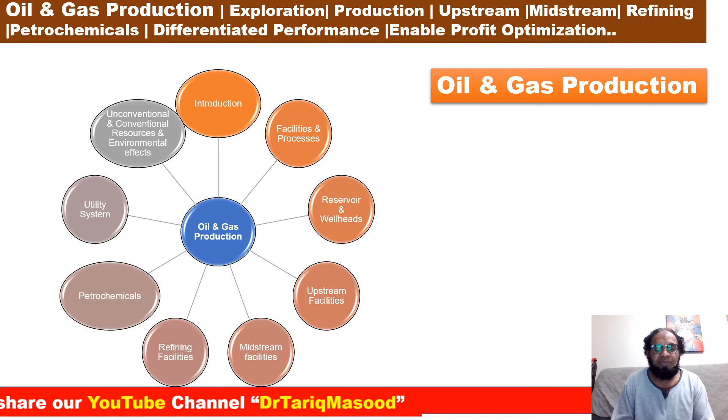Now we have already started discussing this area. We are discussing unconventional, conventional resources and environment effects.

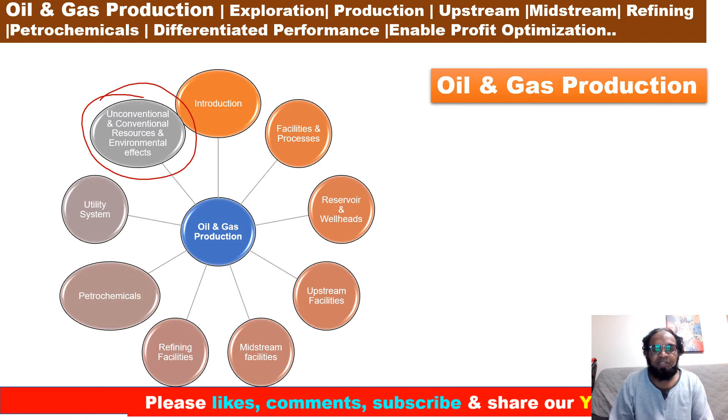Okay, what is the ultimate goal? Shaping the clean and sustainable global energy - this is the first ultimate goal, and we have a plan to deliver more than 300 lectures over the next couple of years.

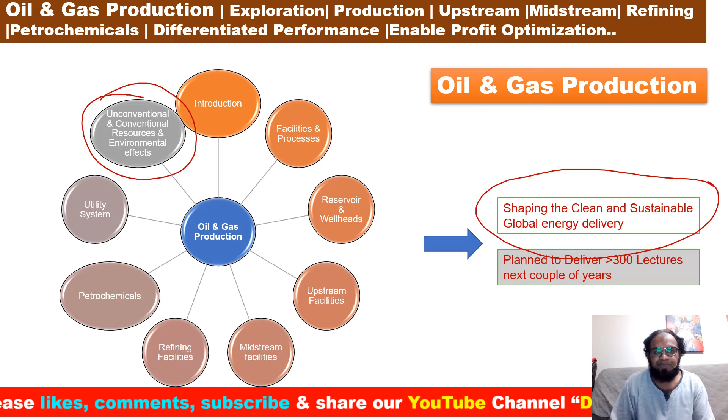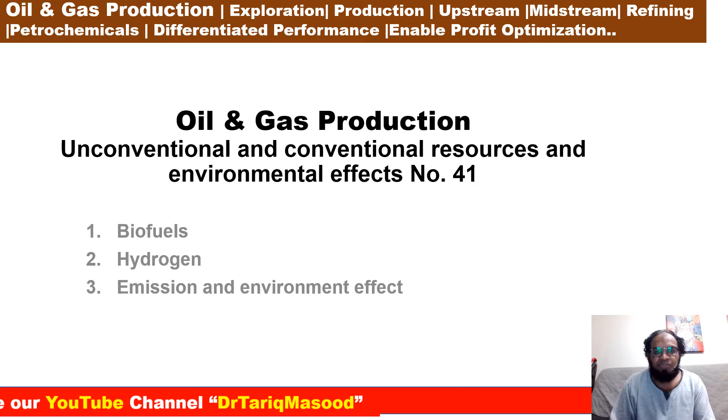Gas production, unconventional and conventional resources and environment effects, lecture number 41. Biofuels, hydrogen, emissions and environment effects. So, key takeaway points from lecture number 41: biofuels, hydrogen, emission and environment effects, we are going to discuss today.

Biofuels are produced from specially grown products such as oilseeds or sugars and organic wastes, for example from the forest industry. These fuels are called carbon neutral because the carbon dioxide released during burning is offset by CO2 used by the plant when growing.

Ethanol alcohol, that is C2H5OH, is distilled from fermented sugars and/or starch - for example wood, sugar cane or beets, corn, maize or grape - to produce ethanol that can be burned alone with retuning of the engine or mixed with ordinary gasoline.

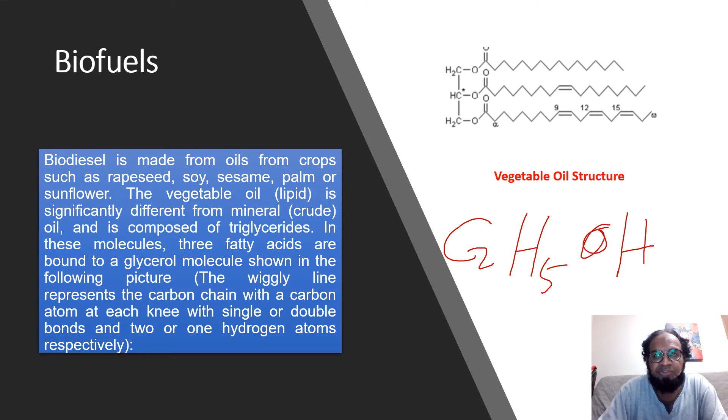Biodiesel is made from oils from crops such as rapeseed, soya, sesame, palms or sunflowers. The vegetable oil, that is lipid, is significantly different from mineral crude oil and is composed of triglycerides. In these molecules, three fatty acid molecules are joined together. The zigzag lines represent the carbon chain, with a carbon atom at each knee, with single or double bonds, and two, one, or no hydrogen atoms respectively.

So this also demonstrates the double bond - this is the double bond here, with a hydrogen atom. So biodiesel is made from oils from crops such as rapeseed, soya, sesame, palms, or sunflowers. The vegetable oil or lipid is significantly different from mineral crude oil and is composed of triglycerides. That's important for us to understand.

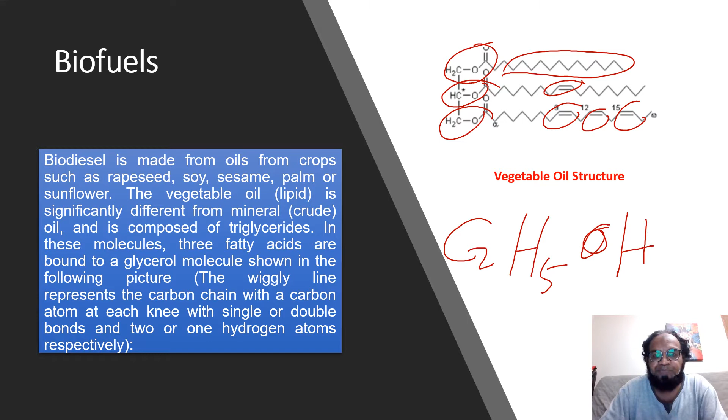Slide number 2, biofuels: the glycerol backbone on the right side, if you can see here, with triglycerides - three molecules of fatty acids, bonding with the OH hydroxide group here. The three fatty acids, as you can see, are palmitic acid, oleic acid, and alpha-linolenic acid, with a total of 55 carbon atoms.

The molecule is broken down into the individual fatty acids through a chemical process called transesterification, whereby the glycerine is separated from the fatty acids.

By adding methanol to the lipids and heating it, along with a strong base capable of deprotonating the alcohol, such as sodium hydroxide, and KOH used as a catalyst, the process leaves behind methyl esters. The CH3 group binds to the acids, along with glycerine, a valuable byproduct used in soaps, explosives, and other products.

Biodiesel contains no petroleum, but it can be blended at any level with petroleum diesel to create a biodiesel blend. It can be used in compression ignition diesel engines with little or no modification. Biodiesel is simple to use, biodegradable, non-toxic, and essentially free of sulfur and aromatics.

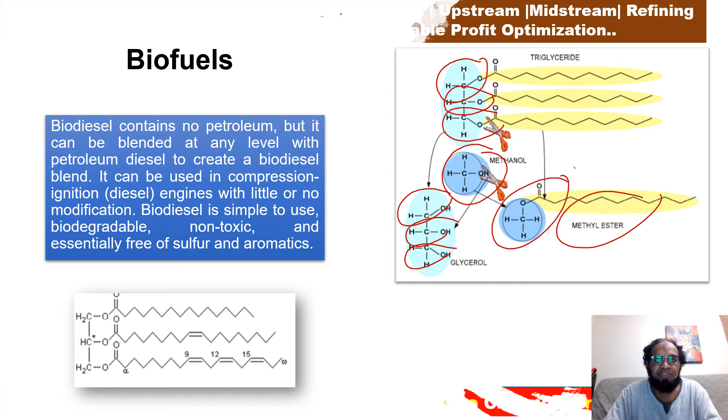Although biofuel is carbon neutral, concerns have been raised about diverting agricultural areas away from food production. Recently, research has shown potential for growing certain strains in arid regions that could not otherwise be used for producing human food. An alternate process, still at the research stage, involves genetically modified bacteria that can produce enzymes to break down cellulose into sugar, which can then be used to produce biodiesel. These methods allow use of general biological waste and limit competition with human food resources.

Hydrogen, although not a hydrocarbon resource, can be used in place of or as a complement to traditional hydrocarbon-based fuels. As an energy carrier, hydrogen is clean burning, meaning that when hydrogen reacts with oxygen, either in a conventional engine or fuel cell, water vapor is the only emission. Combustion with air at high temperature will also form nitrogen oxides.

Hydrogen can be produced either from hydrocarbons, natural gas, ethanol, etc., or by electrolysis. Production from natural gas is often done via synthesis gas, as discussed in lecture number 36-37, with up to 75 to 80% efficiency. An advantage over methane gas is that the carbon dioxide can be removed and handled at a central location rather than by each consumer, providing a cleaner energy carrier.

Hydrogen is also produced from water by electrolysis, with an efficiency of about 25% at normal conditions to about 50% under high temperature, high pressure processes, or in various recycling processes in the chemical industry. For example, hydrochloric acid is recycled in the...

polyurethane process. The energy supply can then come from renewable resources such as hydroelectric, solar, wind, wave, or tidal, where hydrogen acts as an energy carrier, replacing batteries, to form a fully clean renewable energy resource and supply chain. In both cases, the main problem is overall economy. Distribution and storage of hydrogen is difficult, as it cannot easily be compressed to a small volume and requires quite bulky gas tanks for storage. Also, hydrogen produced from electricity currently has an end-to-end efficiency that does not compare well with gasoline or electric battery vehicles.

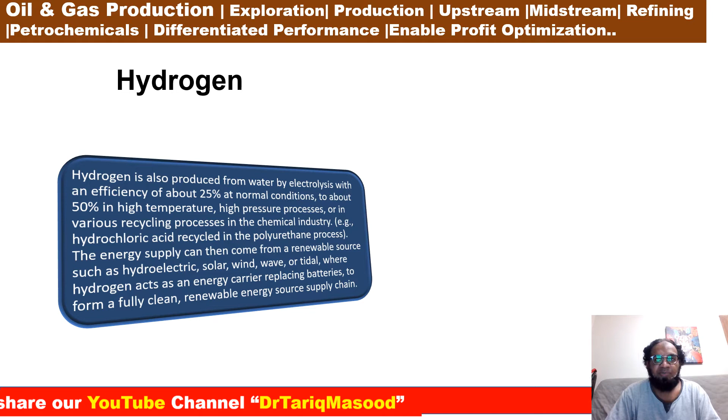Now we'll discuss emissions and environmental effects. The production, distribution, and consumption of hydrocarbons as fuels or feedstock are globally the largest source of emissions in the environment.

The total annual world energy supply of 11,000 million TOE is based 81% on fossil fuels, and releases some 26,000 million tons of carbon dioxide plus other gases, such as methane, into the atmosphere. The most serious effect of these emissions is global climate change. The Intergovernmental Panel on Climate Change, often called the UN Climate Panel, predicts that these emissions will cause the global temperature to rise from 1.4 to 6.4 degrees Celsius by the end of the 21st century, depending on the models and global scenarios. That covers how emissions and the environment are affected.

Now, the emissions from industry can be divided into several types: first, discharge; second, accidental spills; third, emissions; and fourth, exposures. First, discharge includes mud, shale, silt, produced water with traces of hydrocarbons, ballast waters, and polluted wastewater with detergent, sewage, etc. Number two, accidental spills.

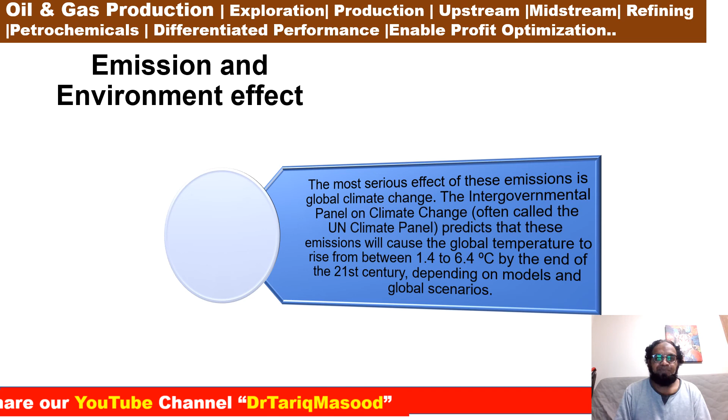That was my last slide. So, in conclusion, what we have discussed today: biofuels, hydrogen, and emission and environmental effect.